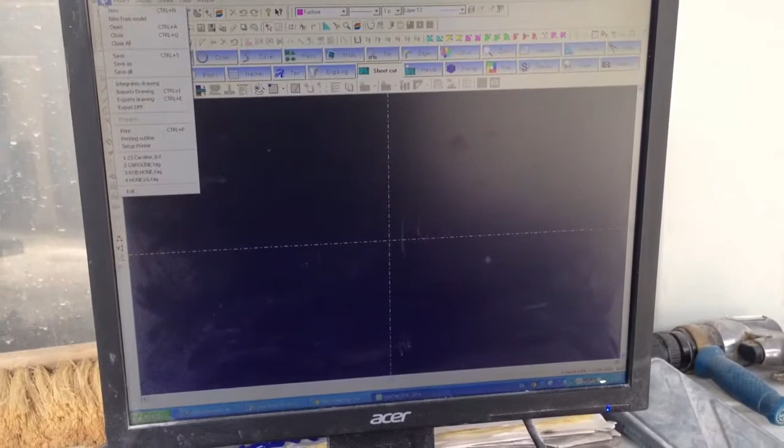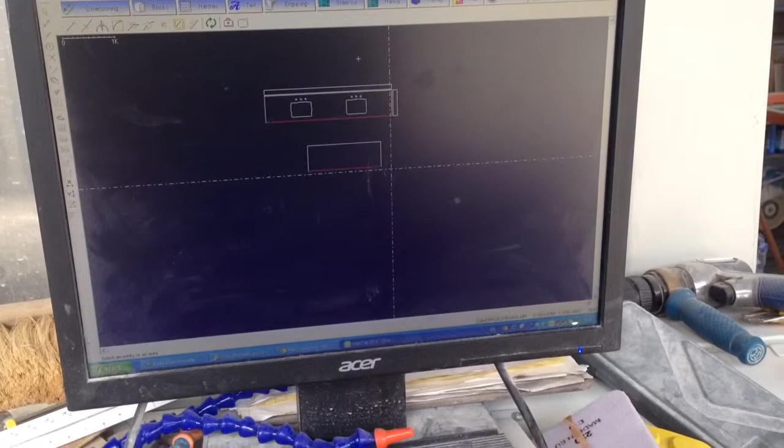Okay, this is how I do milling and everything on the table using LogoTag and FresaTag. We're going to import our drawing, which is a DXF. I will explode it. I am going to click verify in the little medic bag right here. Everything is good. I will select everything. Make sure it's on layer 13. This is very important. It has to be on layer 13.

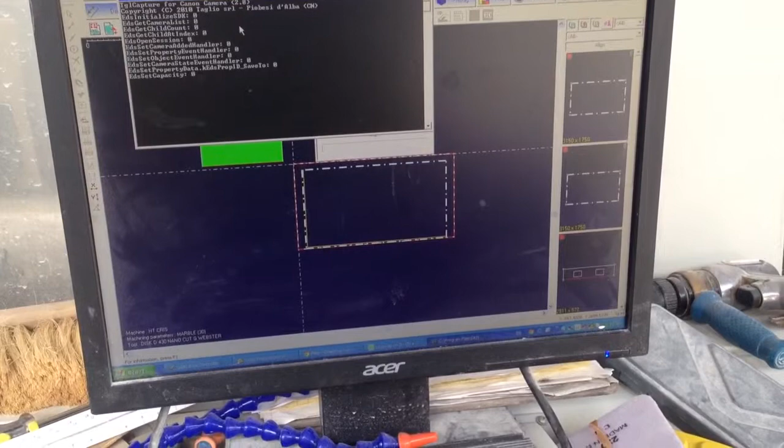Go to sheet cut. New project. You want to make a sheet cut for this project? Yes. All the parameters are right. Okay. That's the blade I'm using. Okay. I don't care about the text because it's only 2 pieces. I will take a picture on the table. Okay, so I have my parts, and of course I have a picture of what I'm about to cut.

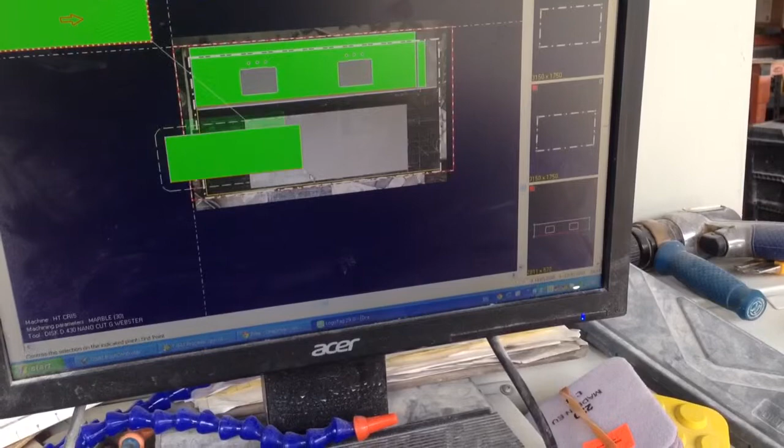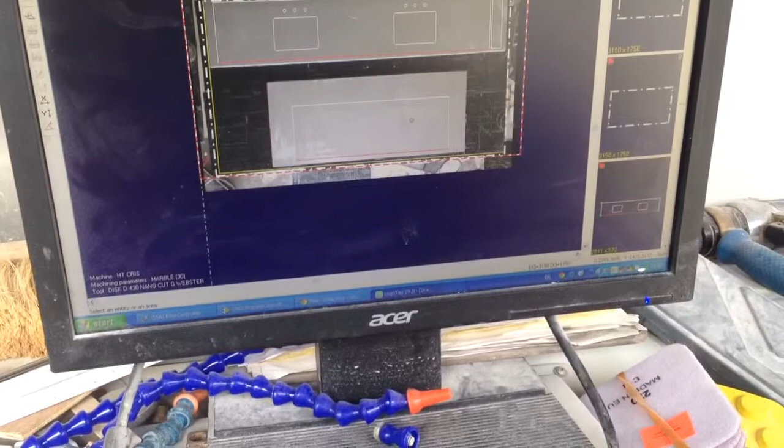Better. Don't worry, I have another piece I will make that splash out of later. Alright, so looks like everything is where it belongs. You can press the J key to kind of see through the image. I'm going to pull this a little bit farther down. Like that. Alright, so now I have it positioned on the table where I want.

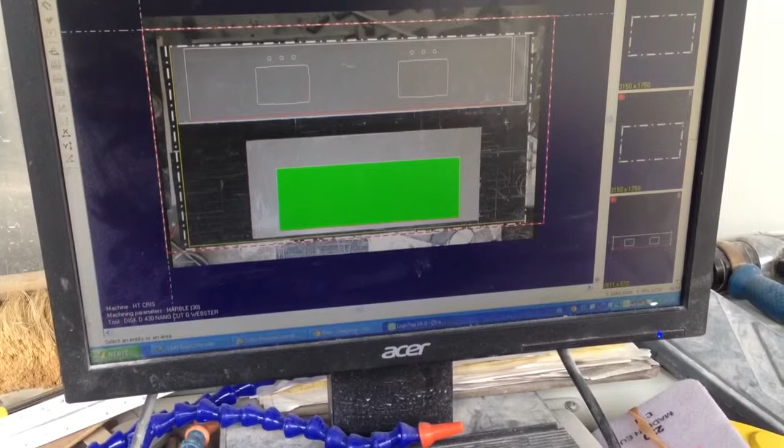This is something I do, I don't think you have to, but I got a habit of doing it. I explode the part again, so now it's just individual lines. Then I'll save it, file, save as, we'll call this Mark, the client's name. Alright, so we saved the tag file. File, save as, Mark, tag file, in case you missed that.

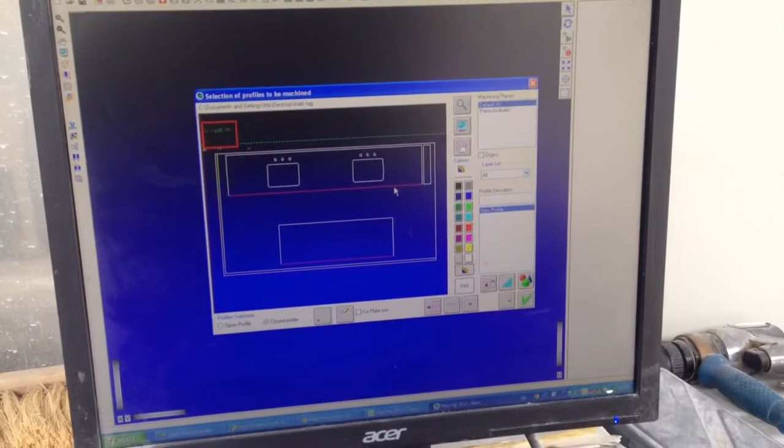Okay. Now, I will go into FresaTag. And I always save the files on my desktop, it's just easier to find them. Click on Working, Profiles, Definition. I'll find my tag file there, Mark, open. I want to select the pieces that I want to work with. I will not select this one because I have nothing to do with it in this program. It just needs to be cut. I'll select the vanity, the 2 sinks, the holes.

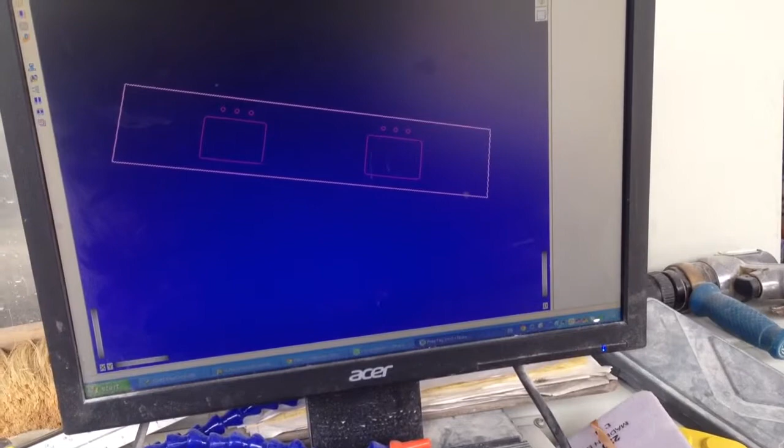Okay, so there it is. That's what I'm going to do. First thing I always do is I like to drill the holes. So you can come right here to canned cycle macro job. Drill, bore, yes, and I think they got too many steps here, but it is what it is. Load the drawing, current drawing. Select your little things there. You can see they're turning red as I select them.

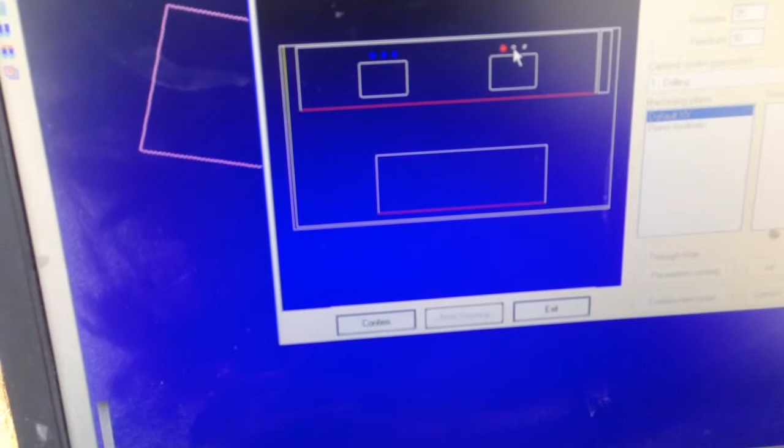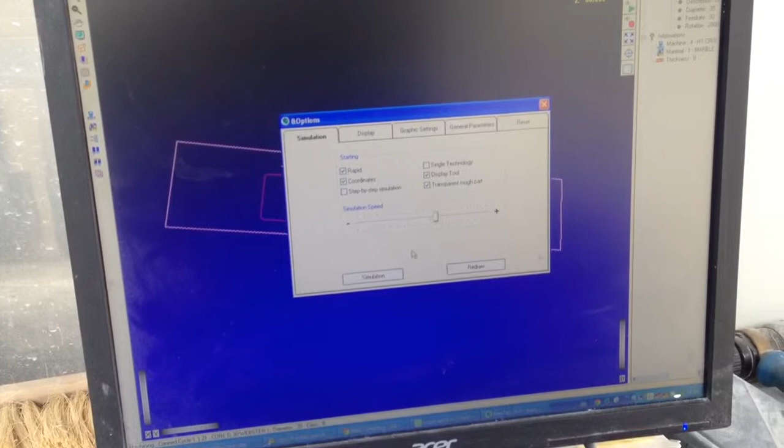Okay. Confirm. Exit. Now I have to go to parameter setting, Z depth 31. Okay. Confirm. And so my simulation is like really fast. Let me slow that down. Okay. There. Now you can see the drilled holes.

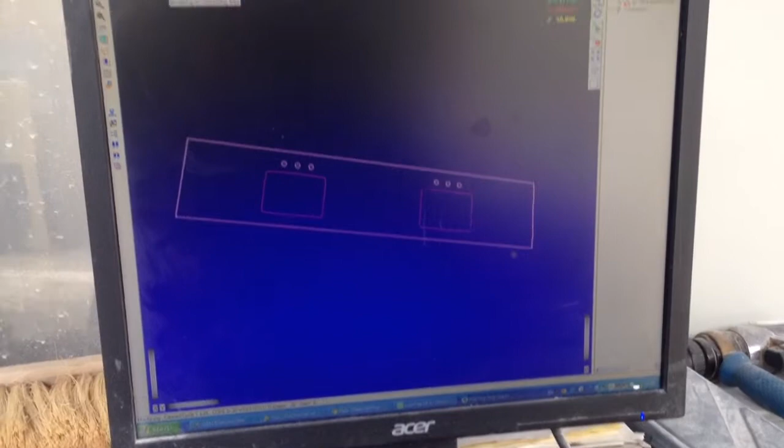Alright, next thing I will do is mill out these things. Mill, and I don't know what you guys use. Let's say it's an incremental finger bit. I select multiple. I will go through that one more time. Right here. Bordering and contouring jobs. Mill, selecting my incremental finger bit, and then select multiple because we have 2 sinks we want to work with.

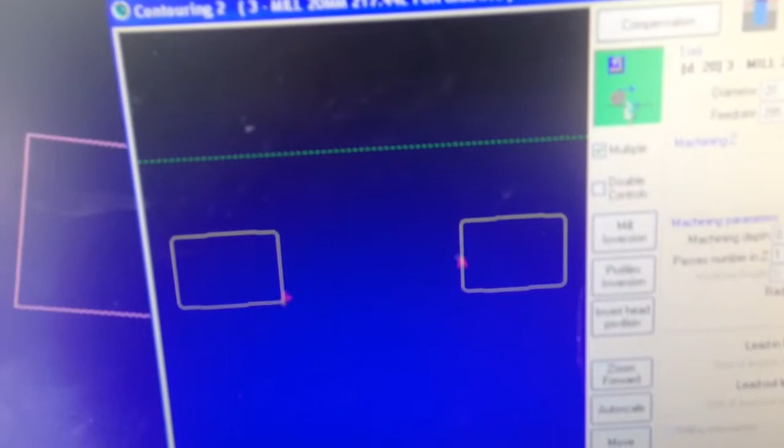1, 2. Okay. And then this here, you want to make sure that this is on the right side. As I click here, this little thing moves and it shows which side of the line it's cutting on. And since this is a sink, I want to make sure I'm inside. On my incremental, I usually run this at about 650 on the feed.

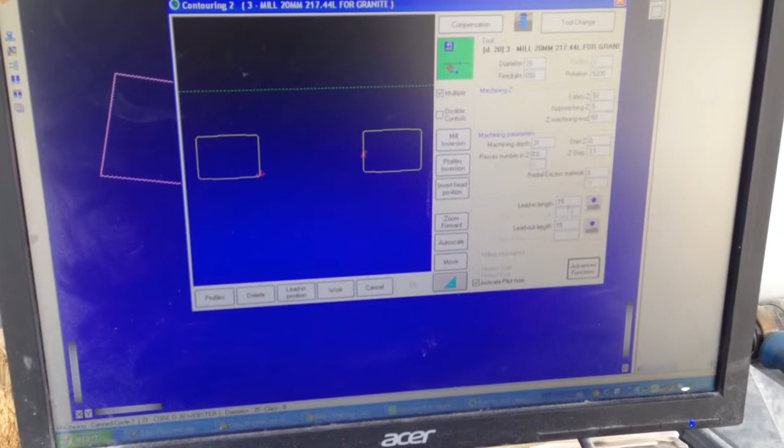RPMs are fine at 5200. The machining depth will be 31. Z step will be 3 millimeters. That's 10 passes. Sometimes you can get by with 9 if it's a soft material like marble. I like to change my lead in to give it a little more space to back up and work, and just click work. Okay. And I don't need a pre-drill hole for this because it's incremental.

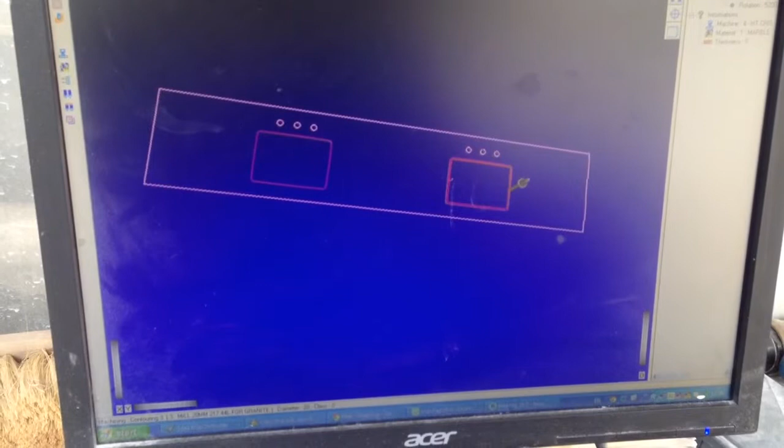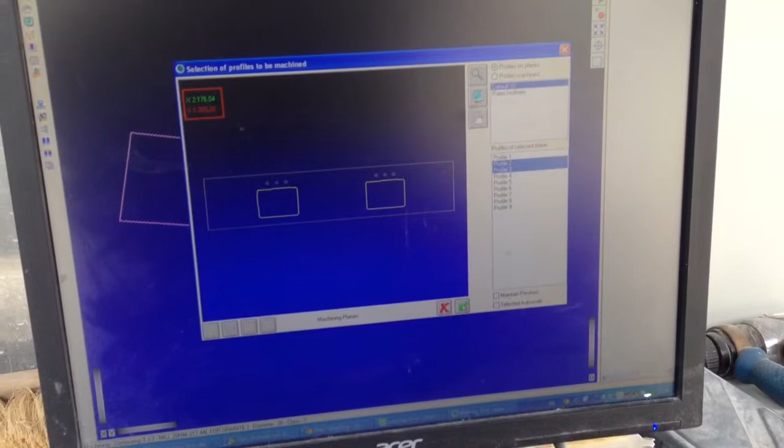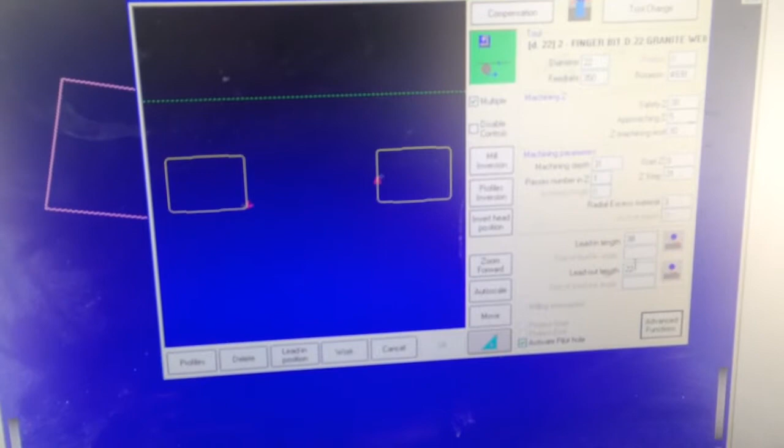Alright, machine depth is 31. Number of passes is 1. This right here, radial excess material, I want to put that at 3 because I want to come back with a marble finger bit and clean this up. Lead in length, this is important. I do 38 millimeters because of my core. I want to make sure it's out there and we got plenty of room and we're not going to mess anything up. Okay, and now we do have to drill a hole here.

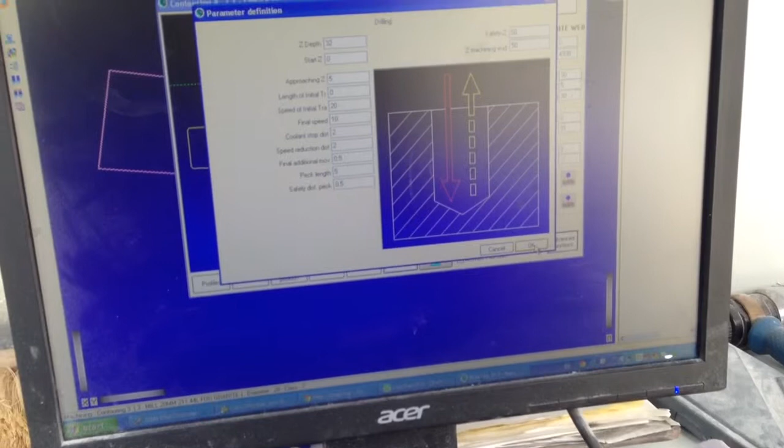So we'll select drill, it automatically pops up. Okay, through the hole, parameter settings, make sure we go down deep enough. I like to go a little bit deeper because I got to pull this core out, so I'll make sure it's all the way through. Okay, so it's going to do that, and it would prompt you to drill a hole and such. Now I would come back in, I will change my tool again, tool change, and I'm trying to hold the camera and talk at the same time. Mill for marble. I will select multiple profiles, 1 and 2.

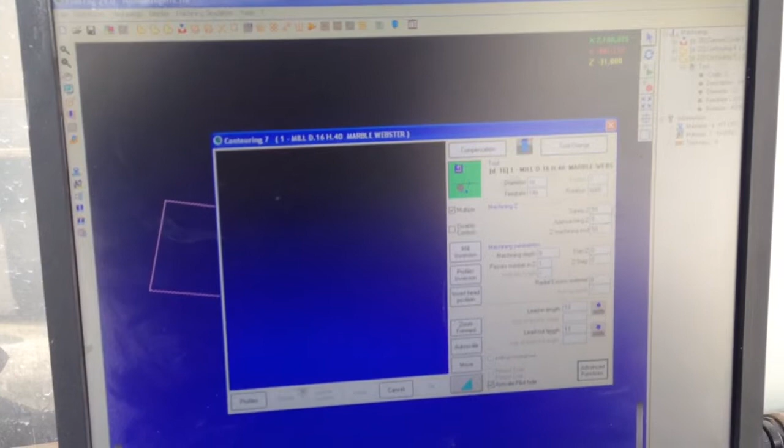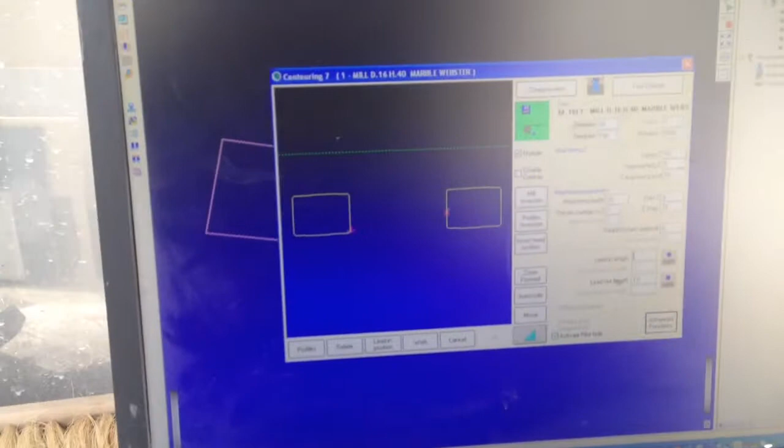Okay, so here we go. This is fine. Oh, this rotation is too fast. I leave the blade on, so I change it to 500. Speed at 200 is good. Machine depth 31. Z step 1, pass 31. No radial excess here because now we want to go back in and get the hole to the size it is. And what using this electroplated finger bit is, it's almost like a Z wheel. It just kind of cleans everything up. It makes it easier for the polish guys whenever they get it, because we can polish our sinks around here. I don't want to drill another hole, that's fine.

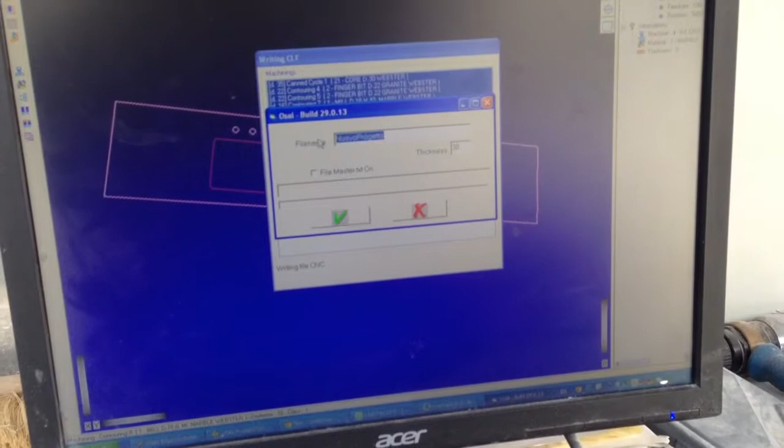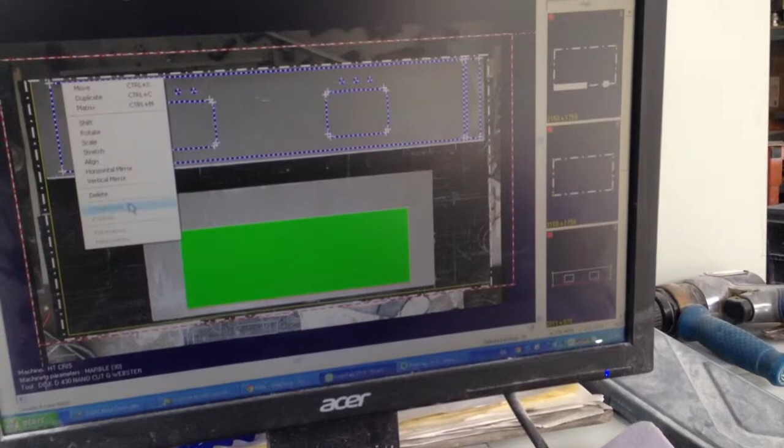And there you go. And then you would just write the program, select all, give it a name. More 1. Okay. And that's it. Then, after it does that cycle, we load that program, activate the program, go through the steps of the tooling. I will come back into here, after it's already cut out the sinks, create a part again, because I separate it. And now it's just a matter of your normal cutting where you just select your lines, how you want to cut it, bam, bam, bam. And I'll do this one, and this one, and this one, and this one.

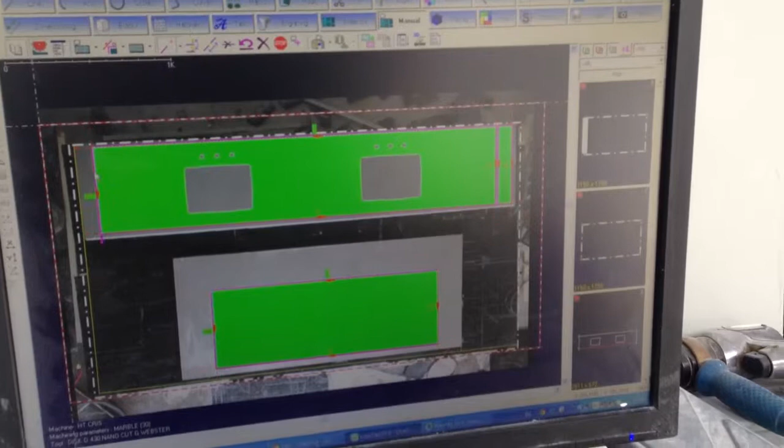I like to extend my lines out just a little bit so the slab is free. Last thing I want is a sink stuck, the whole countertop stuck in the middle of a slab somewhere. And I will just write that program and give it a name. It'll be Mark 3, whatever you want to call it. And do that program, that's it. Hope that helps.